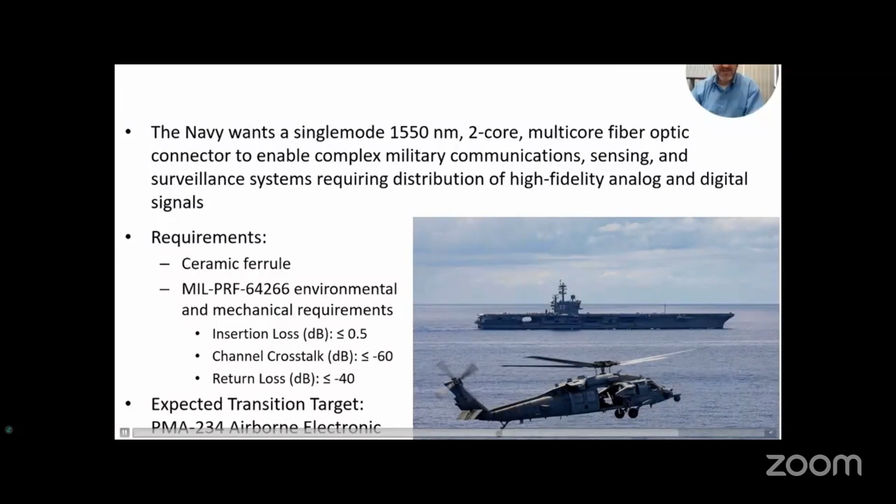Artificial intelligence is accelerating fiber sensing capabilities, enabling real-time data processing, anomaly detection, and predictive maintenance. By combining AI-driven analytics with distributed acoustic sensing and other sensing principles, we can reduce costs, enhance network resilience, and support smart city developments.

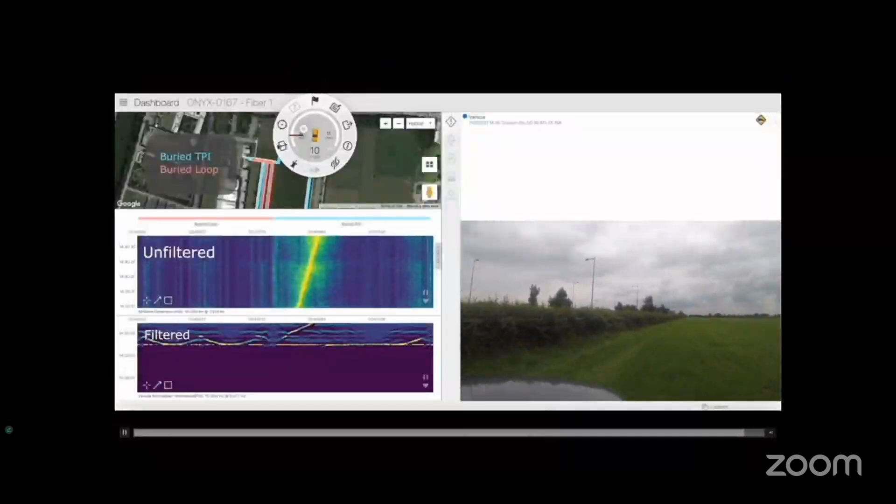Thank you very much, everyone, for joining the online industry meeting on fiber sensing. We are all really excited about this topic for many reasons. Some of them I just said in the video, others because this is a community. All of you are a community that have been working on this topic for many years. And I think we have a huge opportunity ahead of us.

We have seen for the first time really telecom operators, companies like Alcatel, like Telefonica, really looking at fiber sensing technologies. On the other hand, companies like, I see Renko here, companies like Somni Solutions made a revolution on testing fiber sensing principles on the Genoa bridge already a few years ago. The industry is looking at us, and we have a problem and a solution to identify the amount of data that we can generate with DAS, DTS, and other sensing principles.

So in the next hour and a half, let's rock the world of fiber sensing. It means the world to me that we have over 100 people this morning here to talk about fiber sensing principles. Let me just say in a couple of words what we want to do here.

So today is all about a meeting in fiber sensing technologies. And as I said before, LioniX and the silicon nitride platform and VPI Photonics and their simulation software is here to let us have a meeting on fiber sensing in which we're going to do the following. This is the rules of the game.

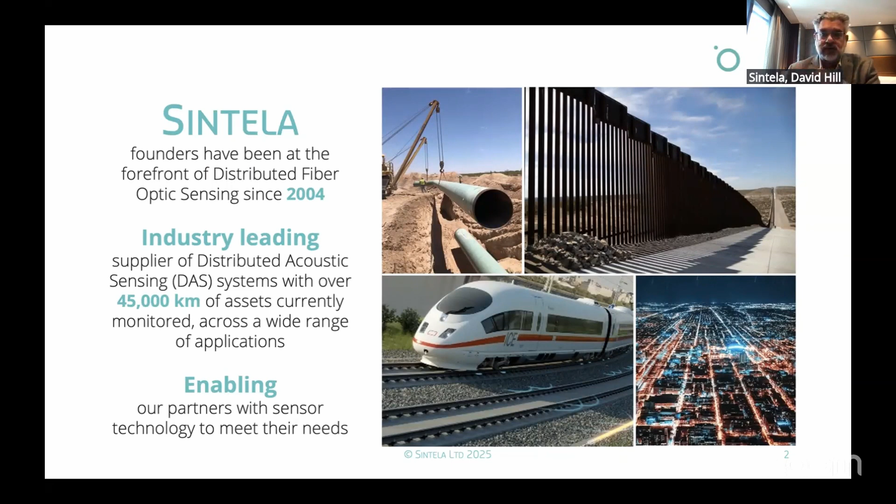So first, I wanted to introduce to you what actually is distributed acoustic sensing. We take standard single mode optical fibers and shine a pulse of light down it. As we shine a pulse of light down it, we get Rayleigh backscatter, and we monitor that Rayleigh backscatter. Because the speed of light is constant in fiber, we can time slice that reflection back, and we can create essentially virtual sensors all the way along the fiber. As DAS has developed, the sensitivity has improved, and therefore the length that we can monitor over. We're now at a stage where on a single fiber, you can do well over 100 kilometers at a meter resolution.

This, in effect, turns any standard single-mode fiber into an array of virtual sensors positioned every few meters. So if you can imagine putting a microphone next to your asset, whether it be a road, rail, bridge, whatever, that's essentially what we create using DAS technology.

Within Sintela, we have a range of different products. Our flagship product is called the Onyx PETA, and the name PETA hints at the amount of data this instrument produces. We can get well over a petabyte of information generated per day through this unit.

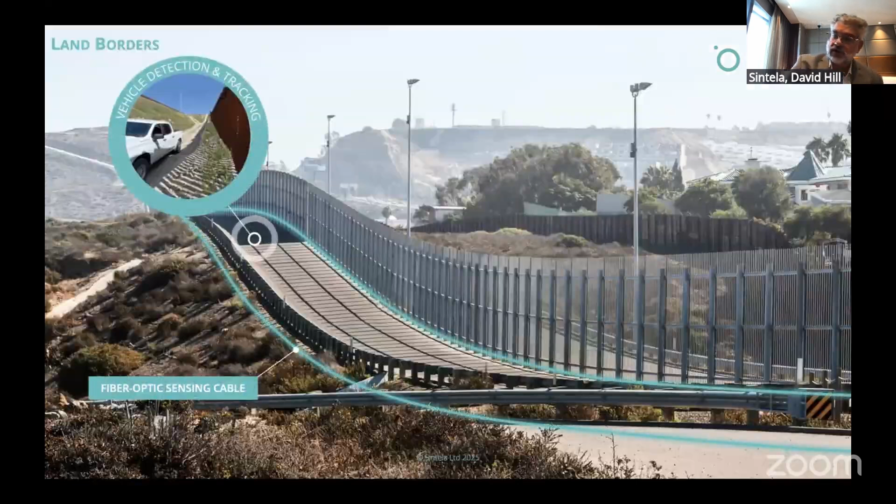So that's essentially our product line. But how do we use it, and what applications are these technologies used for? Well, there are multiple. One of the key ones at the moment is border protection.

These systems we deploy using fiber that's already deployed along borders, normally buried in the ground. We can use the sensing system to detect and, most importantly, classify activity of interest, whether it be a moving vehicle, a person walking, somebody climbing a fence, or cutting a fence. These systems are deployed along the US border and other borders, and have proved to be an extremely effective way of providing covert, persistent, and gapless monitoring of very large borders.

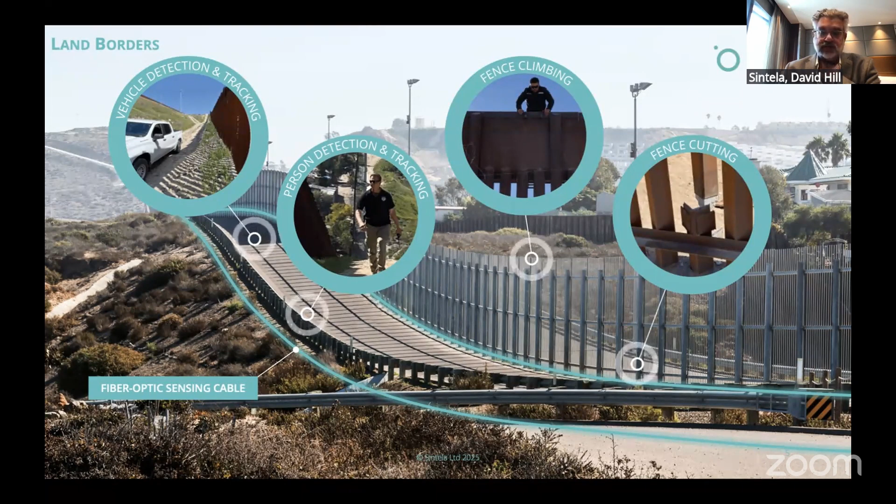In a similar vein, you can also use it for critical national infrastructure and perimeters. On borders, it's typically buried, but you can fence mount it, and on perimeters, many perimeters, you would fence mount these systems.

Fiber optic sensing hasn't had a great reputation in the past for perimeter security because it tended to false alarm a lot. The reason this is very effective now is we have extremely high probability of detection, but most importantly, extremely low nuisance alarm rates, which makes it a very effective tool for perimeters.

Again, you can detect people, fence climbing, cutting, but the important thing is you can use the information, the geolocation of events, to slew to cue other assets such as cameras.

In the rail industry, we work with partners, a company called Sensonic, and they use the fiber to look at train wheel defects as well as track defects, also rockfall detection, and security applications such as railway infrastructure theft, like people stealing copper cable. This gives continuous monitoring of all of these assets.

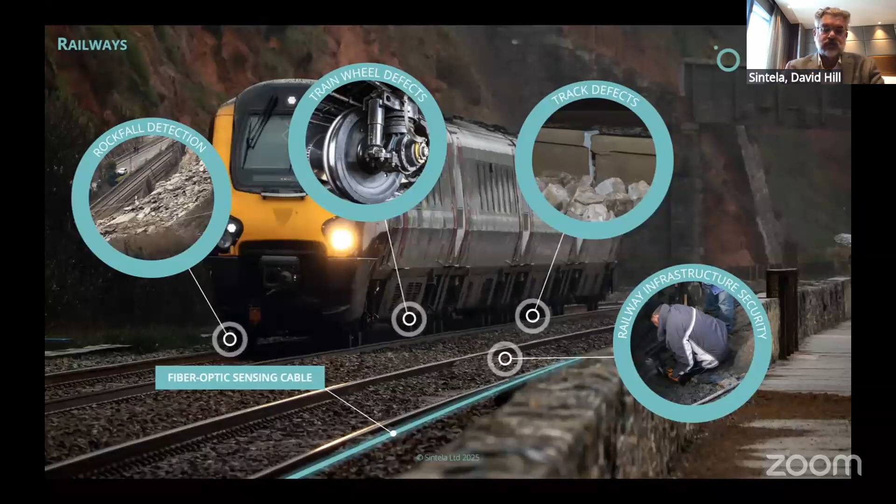On highways, this is deployed along highways using the telecommunication fiber that's often in place. It may be on the hard shoulder or down the median strip, the middle of the road. Using this fiber, we can gather effective traffic flow statistics, looking at the volume of traffic, the average speed.

And what it's doing to inform traffic management systems. But also we can look at condition monitoring of the road surface and have situational awareness should any incident occur, such as a crash. We can see that within the data, and we're writing algorithms to automatically alert on those events.

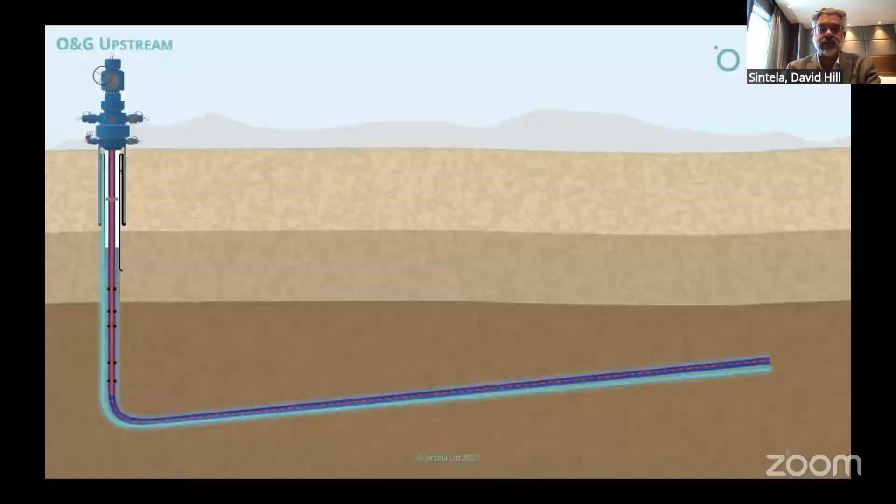In the oil and gas industry, on the exploration and production side, we're partnered with a company called Schlumberger, or SLB as they've now been called, which is the world's biggest oil and gas service company. They exclusively use our product to monitor fibers that are in wells, for both passive and active seismics, flow, injection flow, and production flow, noise, cross-well strain, and many other measurands that can be detected on the fiber in wells.

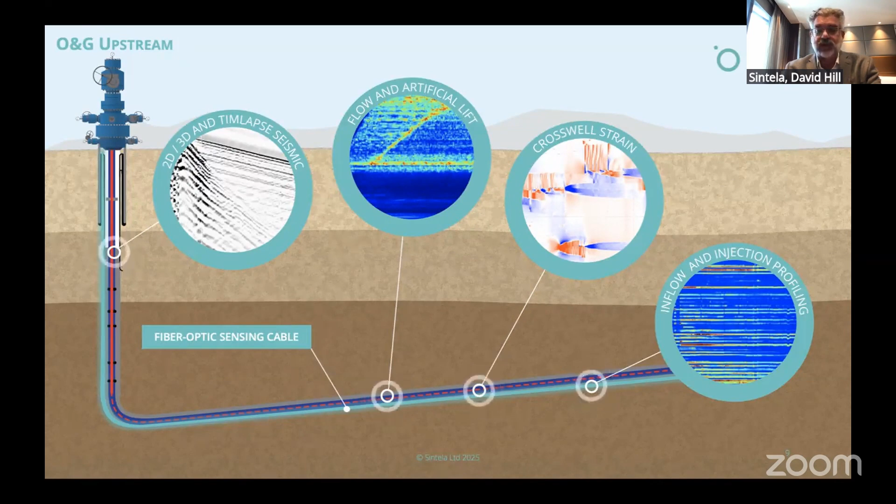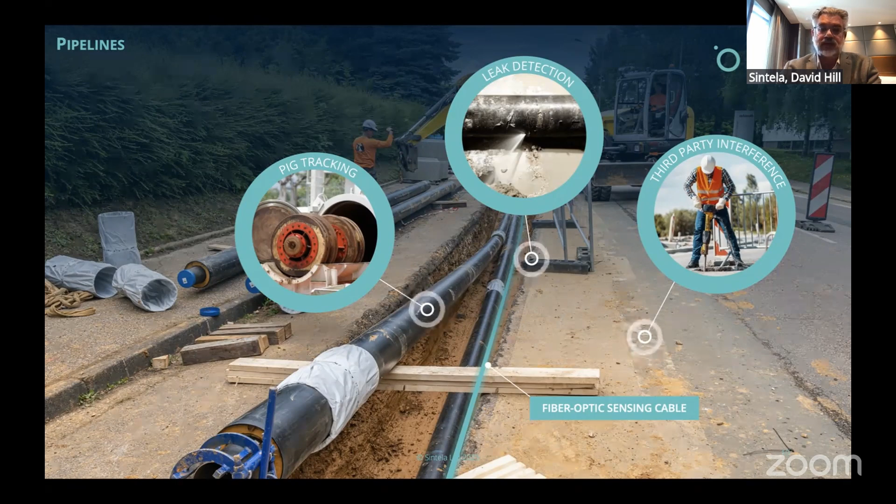Also, we look at pipelines. This is the area where we started 20 odd years ago, using telecommunication fiber that's laid next to pipelines. These are quite often transcontinental, many thousands of kilometers in length. The DAS systems monitor for a number of things: third-party interference, people either accidentally or intentionally trying to get to the pipe to steal product or do damage, leak detection along the pipe, as well as monitoring the location of the pigs, the pipeline inspection gauges used to clean the pipes.

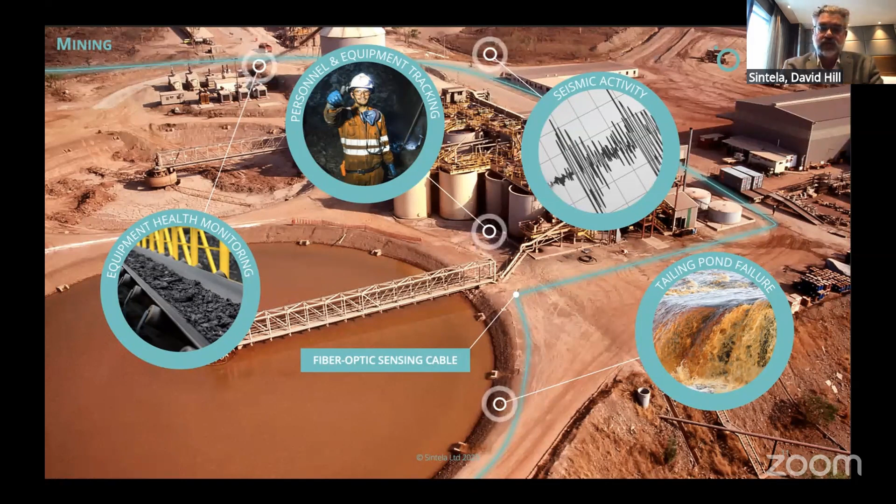Mining is quite a new area for us, but has many applications. Everything from seismic monitoring to make sure that when they're doing block cave mining, the rock is stable enough to be mined. We're looking at tailing dams and ensuring they're not about to fail. Equipment health monitoring, such as the very large conveyor belts, is also being monitored using our systems. And we can actually track the people within the mine shaft itself, detecting the presence of people and machinery to give mine operators an overview of exactly what's going on within their mining complex.

Power industry is a really exciting one. The world essentially has to double its amount of power transmission within the next 25 years to meet global demand because of EV vehicles and the drive to net zero. So being able to monitor these power lines to improve efficiency of power transportation is a key thing, and that's what we do - both detecting things happening to the power lines, and detecting what's happening to the conductors themselves, to improve transport efficiency.

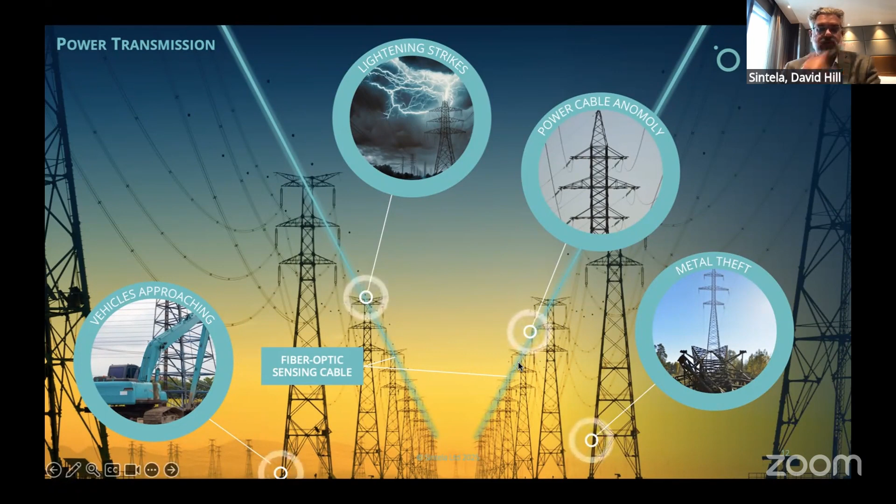Subsea cables is another big area - you'll see it in the news at the moment. We have several of our systems employed on subsea cables, monitoring them for anchor drag and cable damage, as well as potential third-party interference.

The final application is in the science community, the geoscience community in particular. Lots of universities around the world use the units for measuring seismic activity, earthquake monitoring, volcanic activity, as well as monitoring the cryosphere - what's happening to the ice caps. If you go to our website, you can see live feeds of earthquake activity, for instance, and some of the other things we did.

So that was a very brief, quick run through of the various applications this technology is currently being used for. I think it continues to evolve and develop as the technology does.

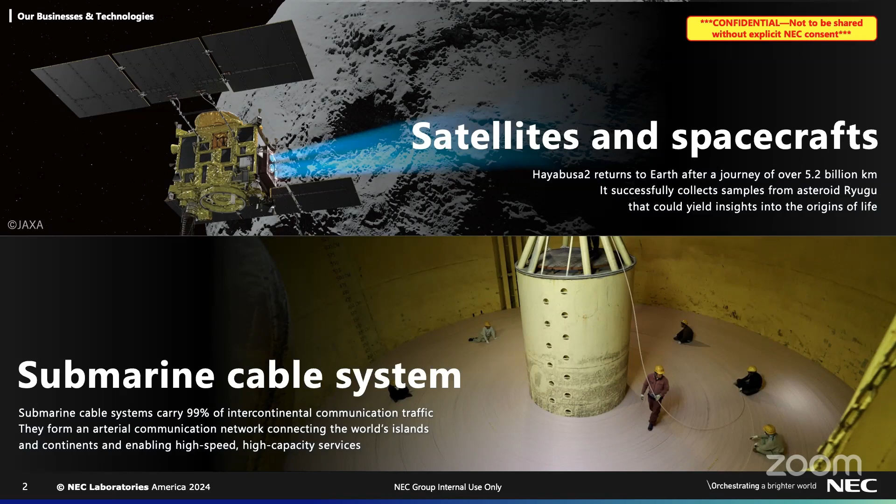NEC Laboratories America is one of several laboratories globally for NEC Corporation, which is based in Japan, a $30 billion year-over-year ICT corporation. The elevator pitch we like to say is we do everything from submarine cable systems to satellites in space and in between, like biometrics and, as I'll talk about, optical fiber sensing.

I am in the laboratories in Princeton, New Jersey, in America. We have offices in Princeton and Silicon Valley. We have many departments doing many amazing things, such as machine learning, etc. I am in the optical networking and sensing department. Our core expertise is optical fiber communication, free space optical communication, and optical sensing.

We've worked for many years on submarine cable networks, and that is kind of where our take on optical fiber sensing came from — the expertise in the most adverse optical environment, which is the long distance and hardship of a submarine cable. We've taken a lot of that secret sauce and put it into our optical fiber sensor, which I'll talk about today. Before I was at NEC, I was actually in the United States Army, interestingly enough, so we also like to think about this from a mission critical kind of perspective for our technology.

Also, just a quick shout out to Optica. We're very happy to participate in many Optica things. I used to be on the editorial advisory committee for Optics and Photonics News, and I'm currently a topic chair for Frontiers in Optics. If you want, please submit to Frontiers in Optics — the deadline is coming up in a couple months. We're very happy to participate in all Optica events. So thanks, John and everyone, for inviting us.

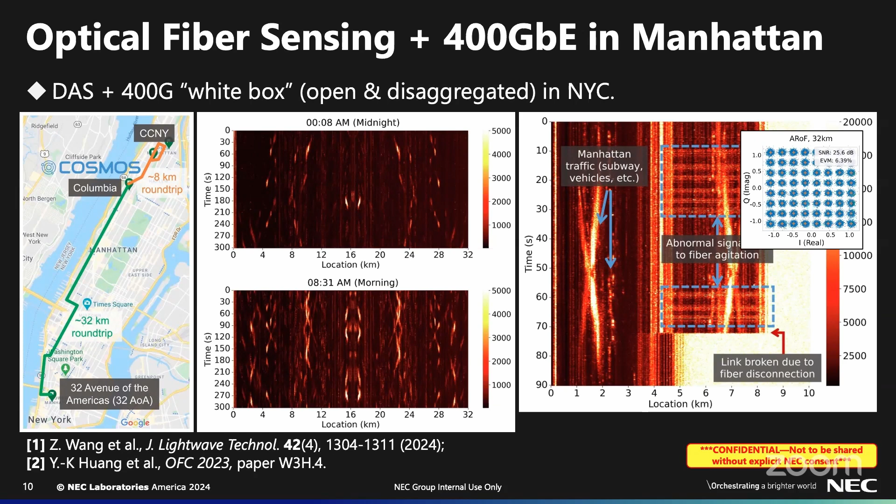What we also did over the years is plug into many different telecommunication providers' networks. We can detect things not just like traffic, but also what the telecommunication provider is interested in: is someone going to dig up the fiber cable or damage it? We want to know if they did it and where, but we also want to be able to preemptively prevent it.

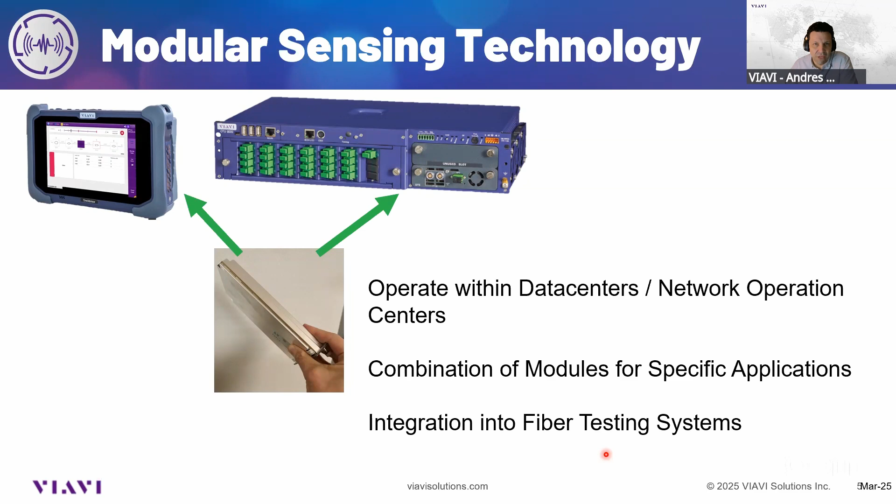Of course, that's the hardware. There's always software. We operate very large networks worldwide, and they share this principle when looking at our network monitoring systems, where our interrogators push data and alarms into the cloud or local networks. In this data analysis, we're going to not only have diagnostics for the fibers, but we can start to do a lot of fiber analytics on how our optical networks are behaving with respect to time.

Which segments may be at risk? Which segments need some level of maintenance? Something very key within telecommunications, and usually a challenge when dealing with these types of cables, is that we need very good GIS capabilities. Since we're already monitoring these very long networks, we can start to georeference all of our alarms.

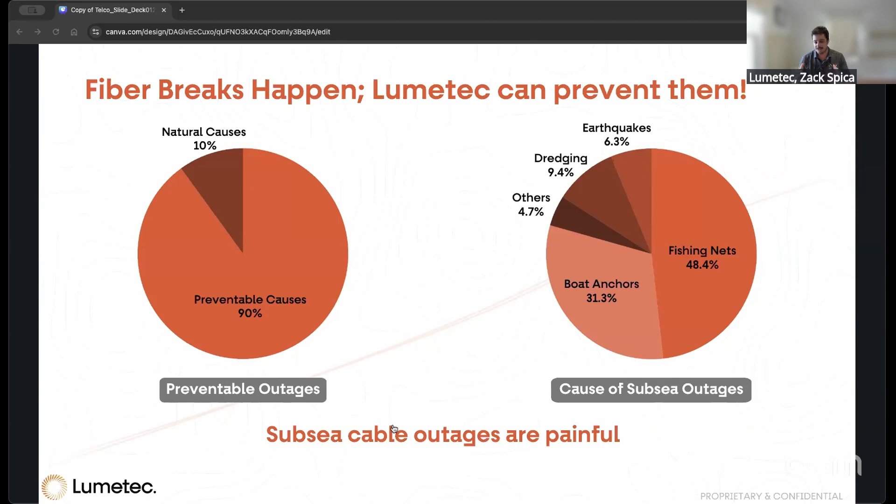So that's really our target. That's what we want to stop, and that's what we want to prevent. But as I said, fiber sensing as a service alone will not solve this problem, because yes, you can have some information, you can know what's happening along your fiber, you can know there's a vessel approaching, you can track them in time and space.

But who are they when they have their GPS or beacon off? How do you recognize them, and how can you actually transfer the liability from the telecom industry, the telecom owner, to actually the culprit that may provoke an accident? That's why we are now merging many different data sources that are available, including satellite data, radar, and long-range sensing, to learn what's happening past the first repeater, where DAS and distributed acoustic sensing is not useful or available.

So our product, which is really tailored for the telecom subsea industry, offers 3 pillars: threat detection, real-time monitoring of surface and ground movement, and contact activities that could harm the fiber. What's really important here is surface and ground contact, and that's where fiber optic sensing will be important, because if there's a boat crossing on top of the fiber, that's not an issue. But if there's contact with the ground that we can detect with long-range sensing or DAS, then that's going to really trigger an alert.

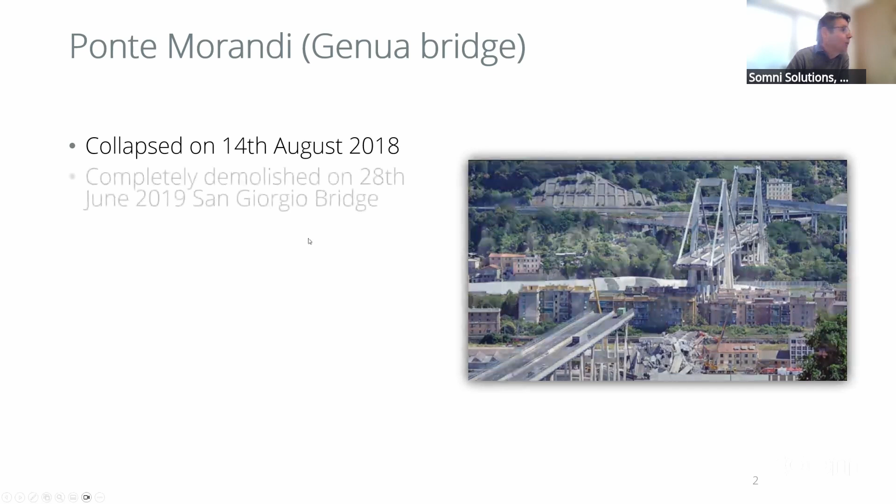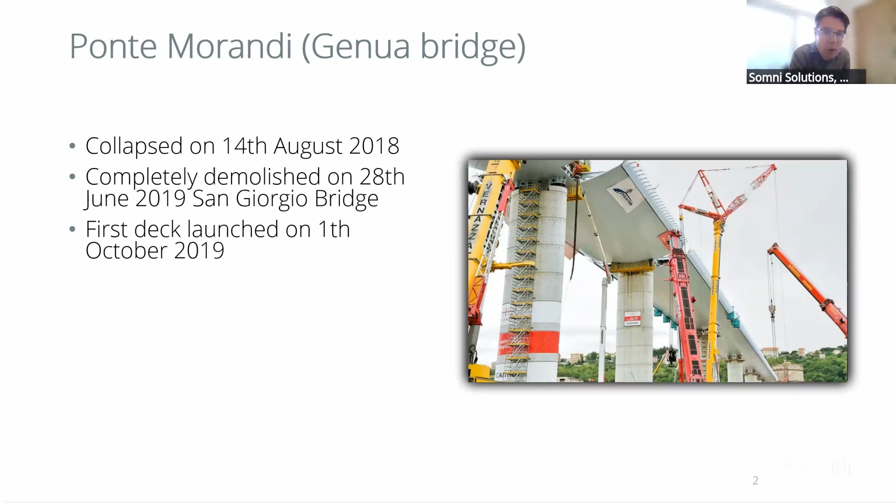So a new bridge had to come quite soon. The whole bridge was demolished in June 2019, and there were plans to make a new bridge, the San Giorgio Bridge. The first deck went really fast, launched in October 2019, as you can see here, and it was finished on the 28th of April 2020. That's quite impressive for such a huge civil engineering structure.

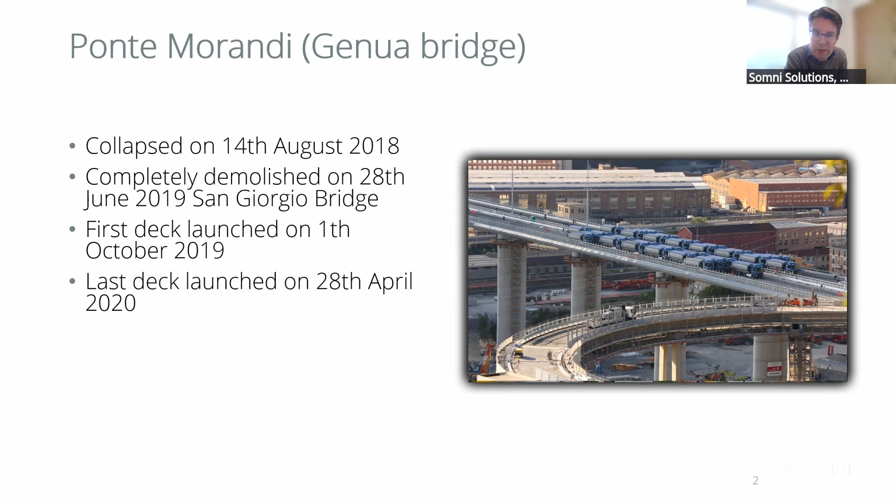For Somni, we provided a large number of tilt sensors, and to be honest, I must admit I bullshitted a bit that we had very good tilt sensors, which we did not yet have. So we were developing, and this was actually our first launching customer, providing 76 tilt sensors to be installed across that bridge. You can see a photo of all the tilt sensors we provided.

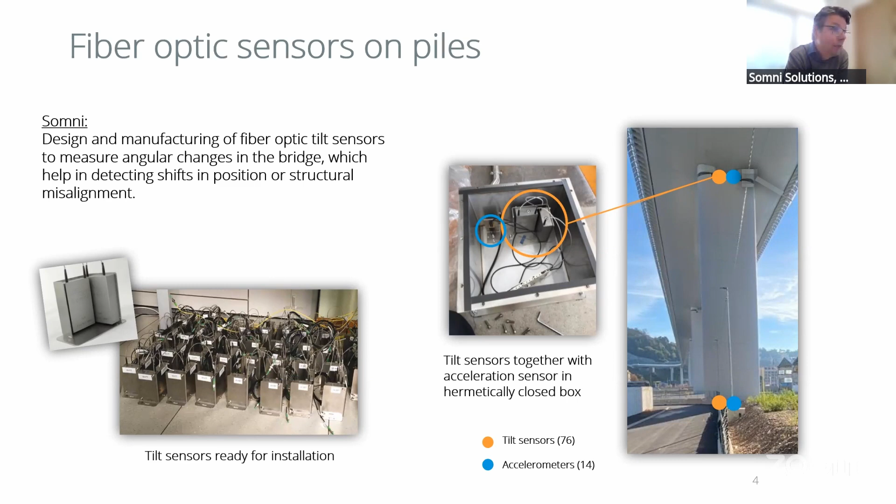They were mounted into enclosures together with accelerometers from Luna, and installed on the top and bottom of each pillar of that bridge for continuous monitoring, 365 days per year, 24/7. And that monitoring is ongoing as we speak today. It's now 5 or 6 years that stuff has been installed, and the monitoring is still continuing without dropping a single data line. So it's working very nicely.

I think this is a very nice example of fiber optic sensor companies working together, providing different types of sensors and interrogators, to jointly come up with a full solution for a bridge. So yeah, thanks again to Luna and Sylex for working together on this specific bridge. And I hope for the upcoming years we can continue monitoring this bridge proactively and avoid any issues in the future. That basically drops down to the end of my presentation. I want to thank you for your attention, and if there are any questions, please let me know.

Remco, thank you so much for your presentation. It's actually a bridge I've personally been over, and it's a great example of collaboration between companies.

There's been a number of questions in the chat relating to distributed temperature sensing, distributed acoustic sensing, and fiber Bragg grating sensing. How would you compare them all briefly?

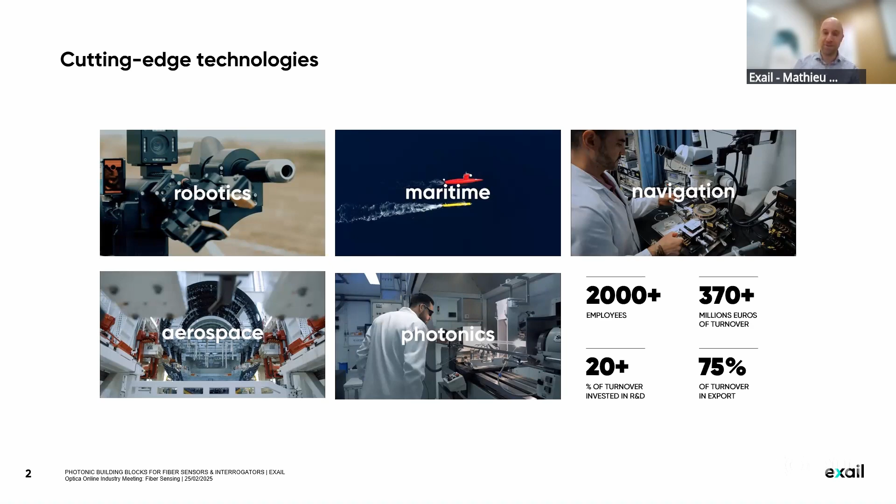So we do optical components, COTS components, and we have three big families of products: lithium niobate modulators for amplitude or phase modulations, micro optics assemblies for example for coherent detection, polarization control, and so on, and specialty optical fibers with again 3 subcategories - active fibers for lasers, PM fibers, and passive fibers.

So we do these optical components in-house, and we also do instruments that heavily rely on these components. Exail has a long history of making fiber optic gyroscopes - those are inertial navigation systems. Basically, they tell you where you are at any given time without GNSS.

If you're not familiar with fiber optic gyroscopes, it's essentially 3 rotation sensors and 3 accelerometers. With these 6 sensors, you can know where you are in real time without GNSS. And for these FOG instruments, the rotation measurement is done using fiber optics. You can see here on the right side a schematic of a FOG instrument, and you can see the coil of optical fibers - that's typically a couple of 100 meters of fiber that is being used to measure rotation.

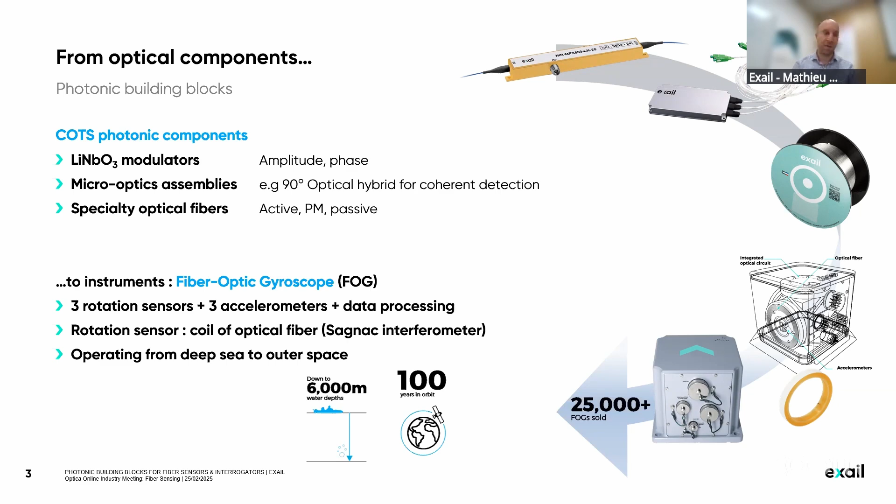Why specialty fibers for sensing? Really, it's a complement to standard telecom fibers, not meant to replace them. When you can use standard telecom fibers, it's still the preferred option because it's very cost competitive. So specialty fibers come into play when you require a specific waveguide or a specific geometry, or you want a coating material that is not the standard acrylate coating that you find on standard fibers.

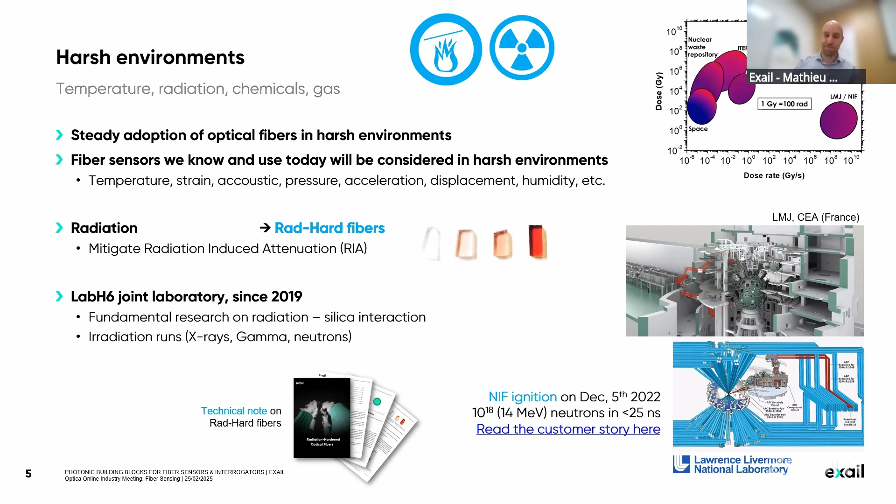And this is my last slide. So I'm trying to answer the famous Optica question: what we can offer is COTS photonic building blocks for both interrogators and fiber-based sensors, so with specialty fiber. We have solutions for standard environments, but also harsh environments, both radiation and temperature.

And also with fiber, there is always this barrier of custom developments. So there is what is available on the website, but we have also many references in stock that are not shown on the website. So if you have some requirements, don't hesitate to contact us, and there is probably something close to what you need available.

As an industry, I think what we need to do is strengthen the collaboration between cable manufacturers, specialty fiber manufacturers, and interrogators, because the spec of the complete system depends on all aspects: fiber, cable, and interrogator. For harsh environments, the fiber can withstand temperatures up to plus 400 degrees C, for example, but there is really a need to package this fiber in most cases, and those packages also need to withstand extreme temperature and radiation levels. So I think there's still some work that can be done on this side.

And that's the end of my presentation. Thank you very much.

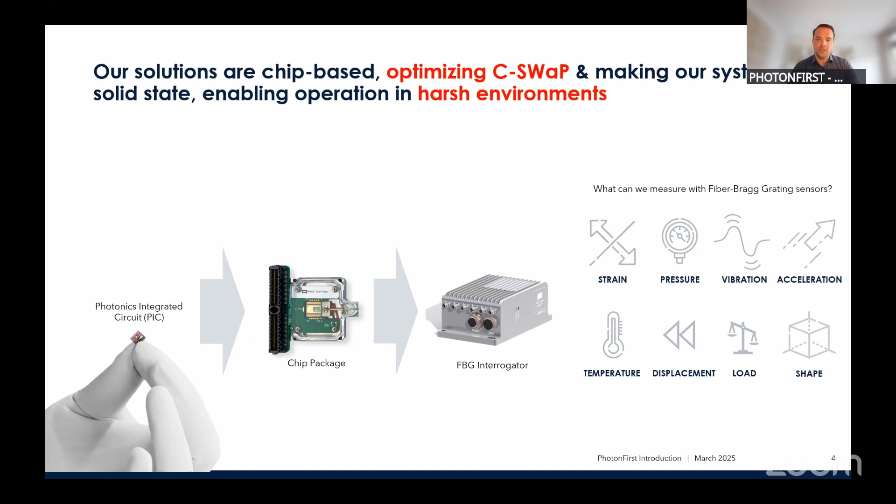We do FBG interrogators and fiber sensing as point sensing, like Remco just explained well. I do want to add that point sensing is not only needed for point sensing applications, it's also a very cost-effective way of applying fiber sensing compared to distributed sensing. I put some numbers in that perspective. Pim's dream has always been focused on integration of optics on PICs from a cost curve perspective.

Like other FBG interrogator builders, Technobis PhotonFirst also started with a 50K FBG interrogator. The last couple of years, we've been around 5K euros, and with the current dollar-euro rating, you can easily read dollar there too. 5K per system. And always with the promise to add more components onto PICs, not just the spectrometer, but also light sources, a combination of polarization units, and also optical switching.

I'm happy to report that this year we're launching Gen 3 systems, which are sub 1,000 euro and will read out up to 1,000 FBGs on one fiber for 1,000 euro per interrogator, which doesn't exist elsewhere in the world, truly leveraging the fact that PIC-based is the way to go in terms of scalability and cost effectiveness. How does that work under the hood?

This is basically what we call the generations of systems, as we go integrating optical components on chips, gluing the chips together. That's why we also do our own packaging at PhotonFirst, and even combining in a next generational system that with an ASIC to go even below 100 euros per system.

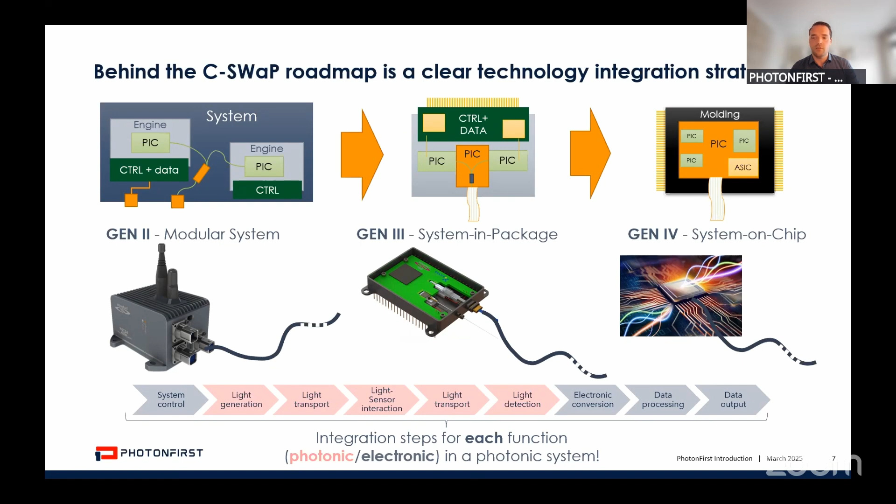This has always been a price point discussion. However, we also see a huge additional benefit of going PIC-based. The fact that we use PIC-based systems is not only potentially really scalable, and as you can see, really cheap, but it's also basically a solid-state system, allowing us to use these interrogators in very harsh environments.

We developed multiple customer-specific systems with DO-160 shock and vibration proof monitoring solutions, aerospace-graded interrogator systems, which can rotate 900 RPM while you don't see it back in the signal. This is a miniaturized interrogator with edge computing built in, wirelessly transmitting real-time data as it rotates 900 revolutions per minute on top of an Apache helicopter. That's what chip-based sensing can do.

Here's a video of the wind tunnel testing of that system itself. And we even launched one into space, surviving minus 53 degrees centigrade and still functioning.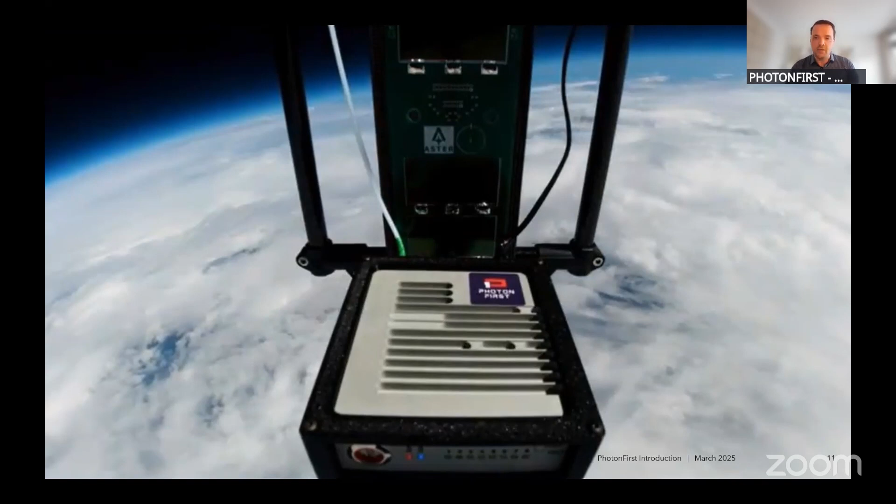As I said, we've been leveraging this knowledge already for years in developing customer-specific interrogators and doing projects with those. We do that in our own clean room in Alkmaar. We have our own packaging facilities, and we chose to industrialize this packaging of PICs ourselves. Most packaging capabilities in the world are based on datacom, meaning they glue chips and fibers together, which is fine if you want to do Netflix.

But if you want to rotate it on top of a helicopter, you need a more sturdy way of coupling, which we developed ourselves. We weld the fiber next to the chip to make it the most sturdy combination possible. This is such a popular packaging capability that we even sell this as an opportunity for others, for example LiDAR parties and quantum computing parties, whose chips we package in-house in Alkmaar.

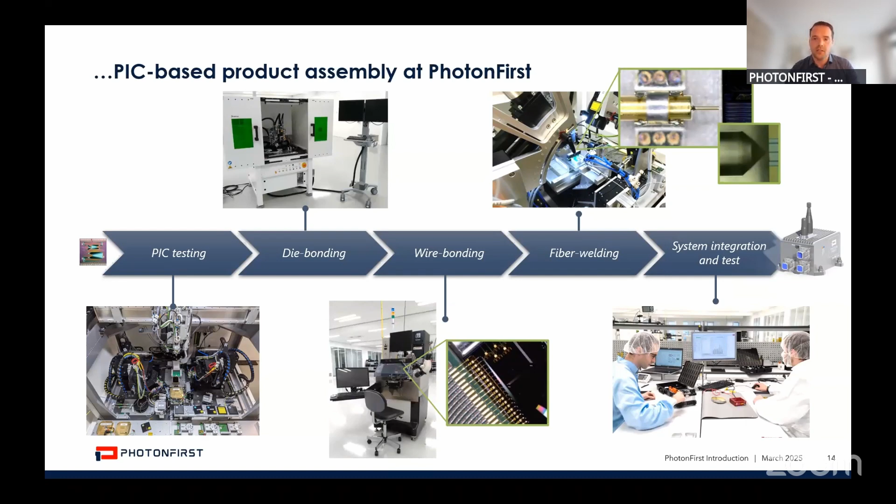I'm also happy to say that not only do we help back-end customers with customer-specific systems, but also, if you look now at our website, we're launching a whole variety of systems leveraging the Gen 3 and harsh environment edge of PICs.

We've traditionally had FBG systems reading out 8 or 64 FBGs. We added edge computing to that, and we now have Gen 3 systems, which we call the Nexus family, where the Nexus 100 reads out, surprise, 100 FBGs on one fiber, and Nexus 250 reads 250 on one fiber, pushing that to 1,000. And to come back to Bram's question to Remco, we truly believe you can push the amount of FBGs on one fiber, which we are doing, while maintaining cost effectiveness, with edge computing at the interrogator itself. A decentralized approach of these interrogators communicating with each other creates a more cost-effective web for the total solution. Again, that's the only thing PIC can do.

I do have to come to the conclusion that selling just interrogators is a difficult task. A lot of potential customers need to see it happening in the field.

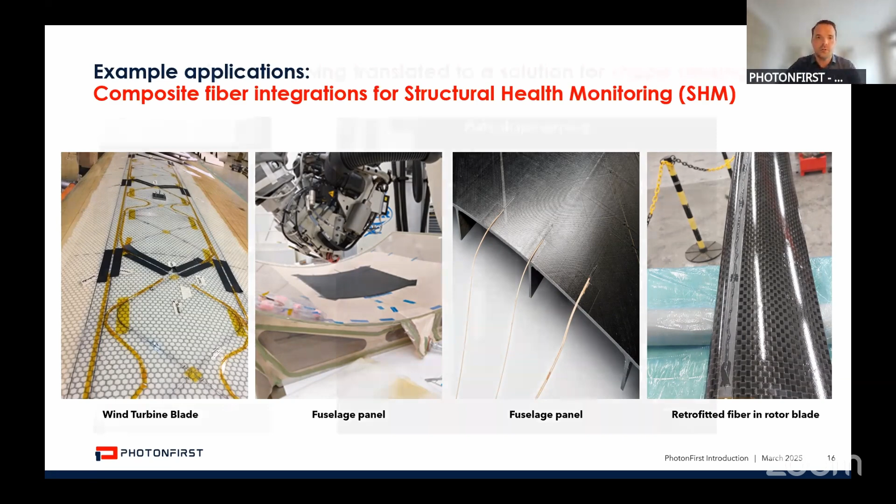That's why we also invested heavily with DLR and NLR, the German and Dutch aerospace laboratories, in applying our fiber knowledge on rotating assets, meaning windmills, but also in defense applications. Here you see a couple of examples where we embed fibers inside or on composite structures to do whole shape deflection or impact detection of composite blades, as shown in the middle. And if needed, we can even do complete shape sensing of a fiber with our interrogators as well.

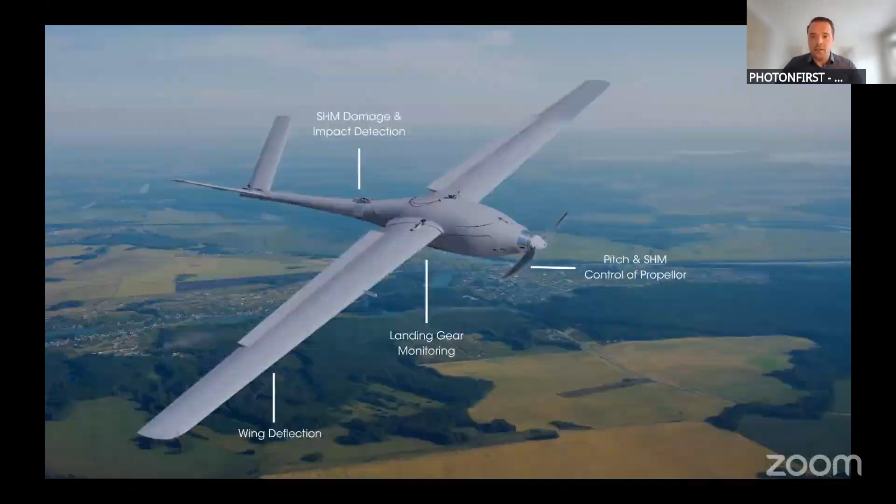To finalize, PhotonFirst delivers and has been delivering for years in traditional fiber sensing applications like structural health monitoring, bridges, transformers, on the railway side, in aerospace. But what you typically see now in the last couple of years is that harsh environments really leverage PICs, not only for cost effectiveness, but in literally space launching systems. I'm happy that Europe is catching up to the US in reusable space rockets, and happy to report that we're in both, and even on rotating assets in the field.

So that's where we are today, and I hope I inspired you a bit to see where we're heading in the next couple of years to further integrate solutions on PICs. If anybody likes to talk further, or we can help you with collaborating with each of you, or support you with fiber sensing systems, then please reach out. Always happy to have a chat, and that might lead to another nice partnership.

Thank you so much, Linda, on the incredible work you are achieving with PICs. I'd like to bring in a couple of companies who also make this kind of work possible themselves. So thanks to NVIDIA, silicon photonics is very topical this week. So I'd like to bring in Dr. Jake Bialy, CEO of Optica corporate member Light Trace Photonics, to introduce their pipeline for accelerated integrated photonic development to help unlock new applications like this that PhotonFirst have been doing. Jake, the floor is yours.

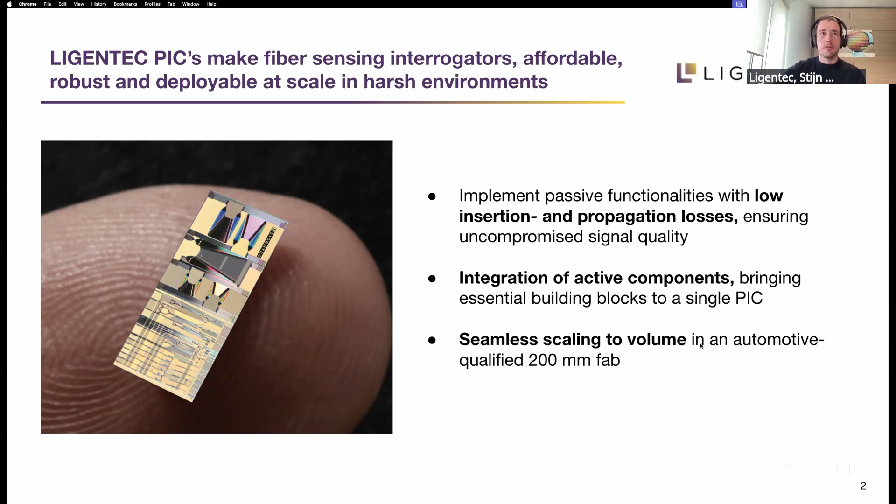Also importantly, all these silicon nitride PICs are manufactured in our automotive-qualified 200mm fab, to make sure we meet the quality standards required for this industry, but also that we provide a direct scaling path to our customers in this field. To give a brief example of what such a PIC would look like, we built roughly a year and a half ago a small demonstrator chip where we integrated a photodiode array using microtransfer printing.

So basically what we do here is we have a pre-processed indium phosphide wafer with a lot of photodiodes on top of it, and then we pick and place many of those photodiodes in parallel to print them on the silicon nitride circuit. Here you can see a small microscope picture of such a photodiode.

In addition, on the same chip, we also integrate the arrayed waveguide grating to build a full spectrometer circuit. Here we can benefit immediately from the low insertion and propagation losses of the silicon nitride, as well as the low phase errors and low temperature dependence, allowing us to have a stable platform for AWG development. This could, for example, be used in a fiber sensing interrogator.

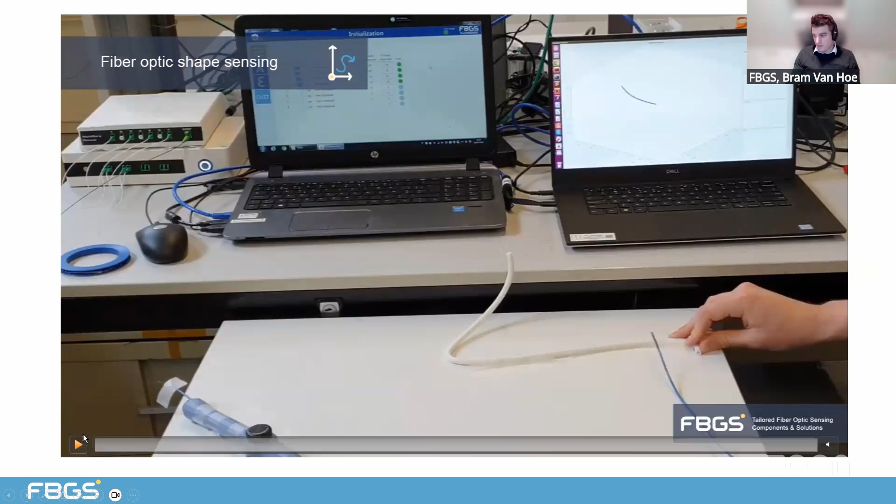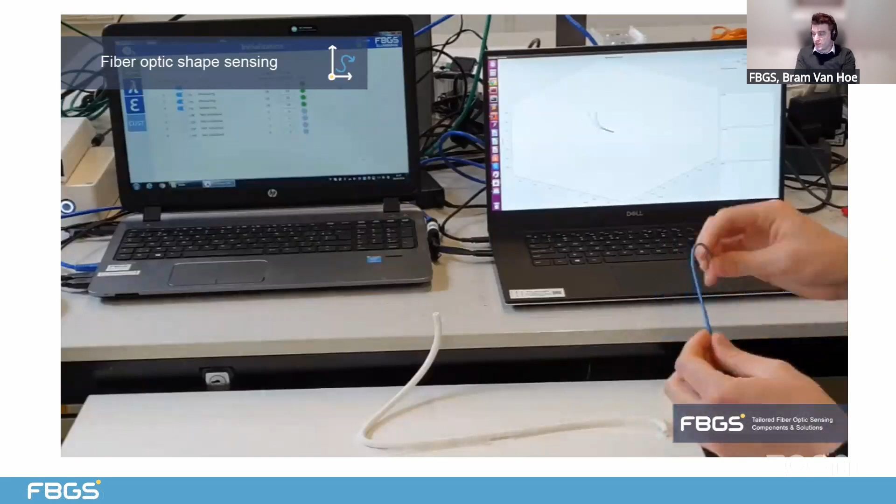To show you how the platform works, here we have a multi-core fiber shape sensor embedded into a catheter device, where the top 15-20 centimeters is instrumented with Bragg gratings and multi-core fiber. You see on the screen in the back that the shape is represented in the software.

This movie shows a different visualization, but comes down to the same sensing platform, showing 3D shape using a flexible nitinol-based shape sensor.

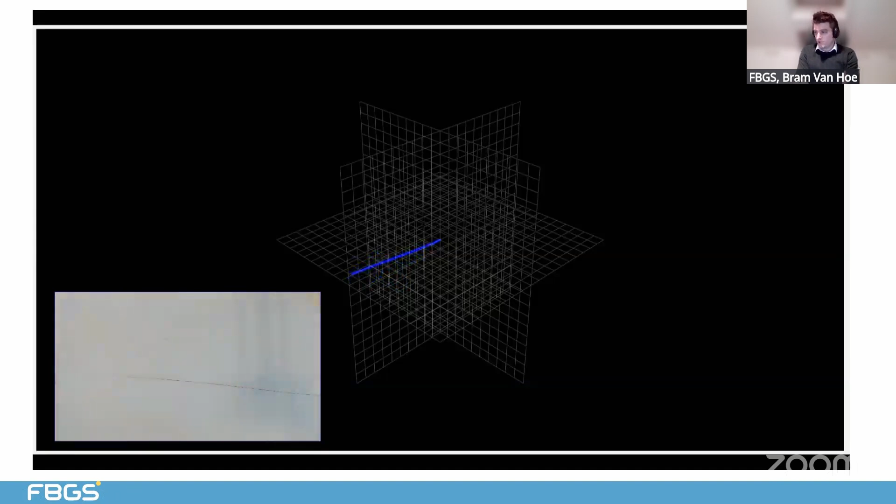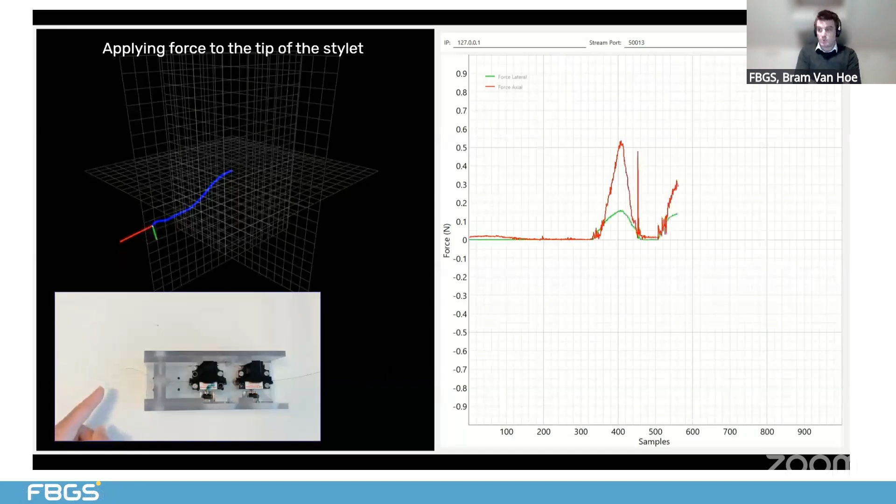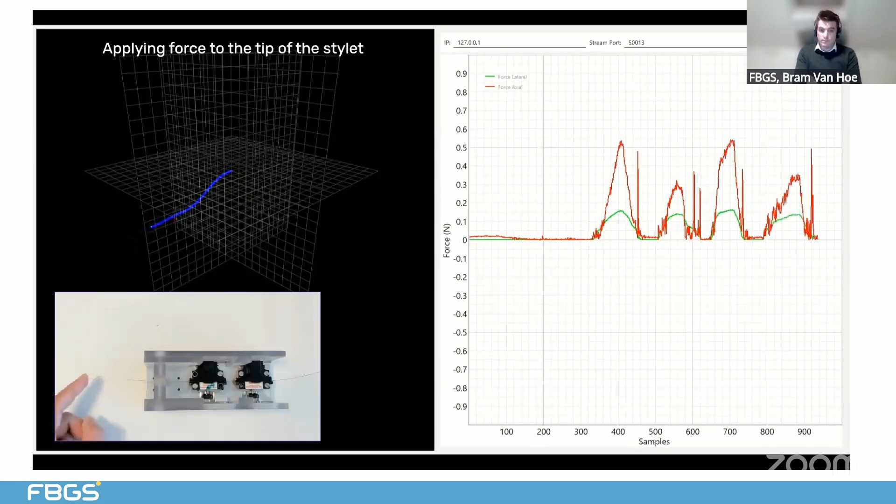Next in the movie is another measurement that can be picked up using the same technology, more specifically tip force. Making use of the same multicore fiber and adding a transducing element, it's possible to do shape sensing along the length of the fiber and also measure the directional force at the tip of the sensor, as you can see here in the movie.

We isolate the fiber, or the sensor, from axial strain effects. It's important to mention that this is a directional force sensor that is not prone to strain or temperature effects.

I rushed a bit through, but I would like to thank you for your attention. Of course, if there are questions, I'm happy to answer them, and we can also talk offline about your shape sensing application and your fiber sensing needs.

One quick question for you, Bram. During this meeting, we've been discussing a lot about companies wanting to do the fiber or wanting to do the interrogator. You actually are doing both for this particular application, fiber sensing and shape sensing. Why did you decide to do that?

Very good question. We decided to do that because we experienced that it is key to ensure the fiber and the interrogator are one-to-one matched, that the compatibility between all the building blocks involved in the system is there. Especially when combining gratings and multicore fibers, there are a lot of restrictions and technical aspects that need to be safeguarded on the interrogation platform as well. So building a full system all the way from the interrogator up to the fiber is key to ensure the overall performance of the system is maximized and that all the building blocks are communicating and interacting well with each other.

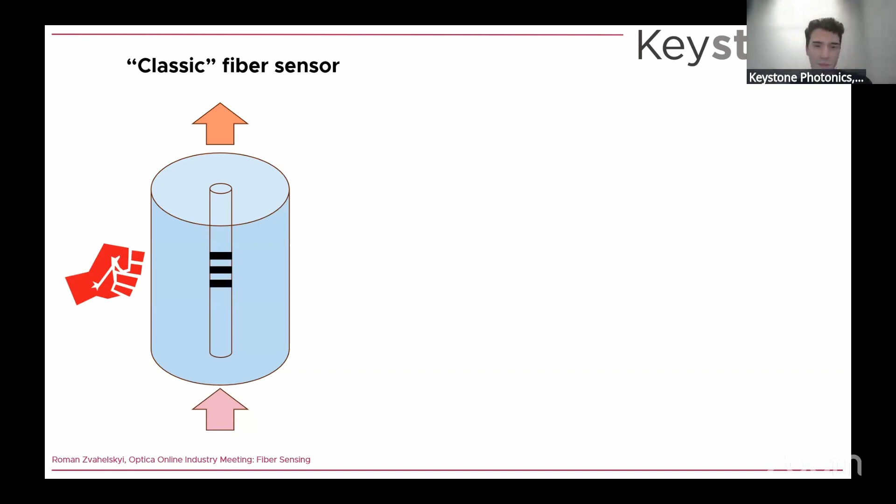Yes, thank you very much for this flattering introduction. I understand we're running out of time, so I'll try to keep it short and give a 1-2 minute pitch. I'd like to start with a definition of a classic fiber sensor. Typically we have a fiber Bragg grating, and if we heat up the fiber, for example, and then measure the reflected or transmitted wavelengths, we can measure the temperature change or strain change and other characteristics. But what we do at Keystone Photonics is something different.

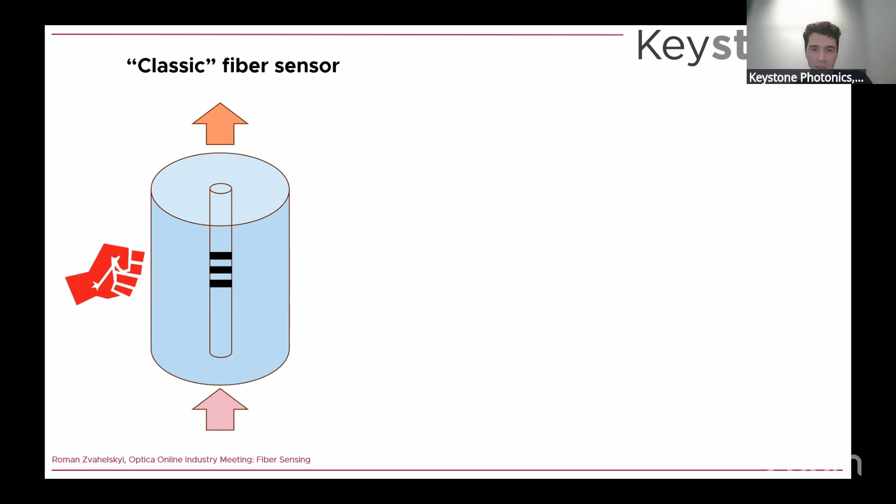So first of all, we don't hit fibers, but what we do is fabricate microstructures directly on fibers. We use technology, as you said, 3D laser printing or 3D two-photon polymerization, and we have capabilities to in situ fabricate micro-optical structures directly on a fiber core. So this is how it looks schematically, and this is how it looks in real life.

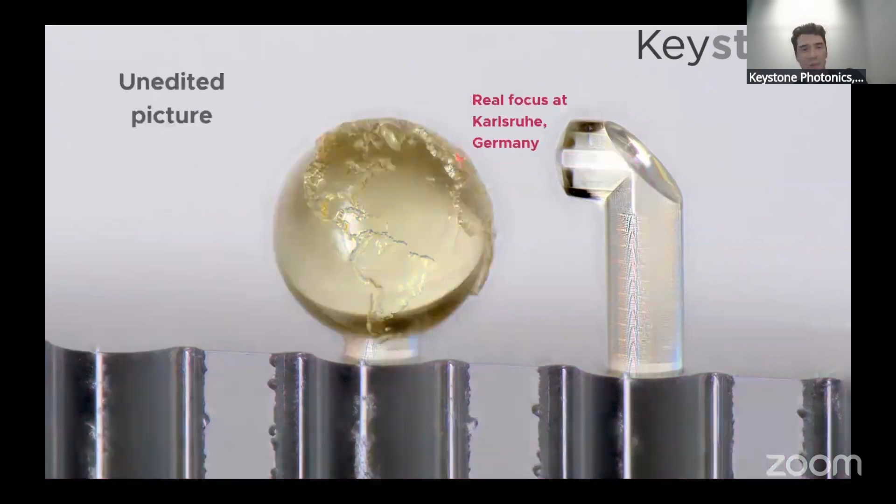This is a cross-section of a fiber array with printed structures by Keystone Photonics. So our typical product is, well, this globe represents a freeform structure, but our typical product is here on the right. This is a mirrored lens that can focus light into any direction, in this case 90 degrees, and this actually focuses into Karlsruhe, Germany, the place where Keystone Photonics is based.

So our typical market is wafer level testing, or optical wafer level testing. We're mainly dominating that market right now. We are the main manufacturer of optical fiber probes, and we collaborate with all major players in this area of optical wafer level testing. So we produce innovative solutions for optical coupling, both for trench coupling, as you can see on this slide, and also for grating coupling. But we're also trying to explore other possibilities on how we can expand the area of applications.

We're a fast growing startup company, and one of our developments is an optical distance sensor. Basically what we do is produce a lens which can introduce a point of best coupling. So if you move your fiber in Z back and forth and collect the back-scattered signal, you can achieve the point of best coupling, and then you can calibrate the distance between your fiber and your surface, for example of the trench or of your waveguide, very precisely. So you do not need any capacitive or other distance sensing devices.

This is one of the possible solutions to fiber sensing, but we are really open to your applications. If you have anything in mind, please reach out to us. You can write to me, or write to Keystone Photonics sales email, and we really want to explore and expand our possibilities because we believe we can use our technology, for example in spectroscopy, and we're also trying to expand into space applications. If you have anything in mind, please reach out. Thank you very much.

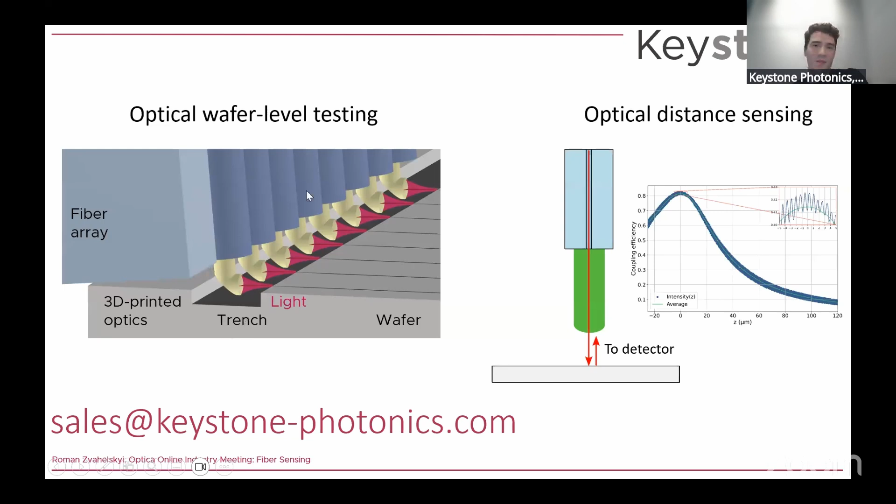Also tell us how the Quantum X can help companies like Chiral Photonics in characterizing specialty fibers. I just want to introduce you to what we can do as a manufacturer of equipment for two-photon polymerization, so micro 3D printing, to print optics for fiber sensing.

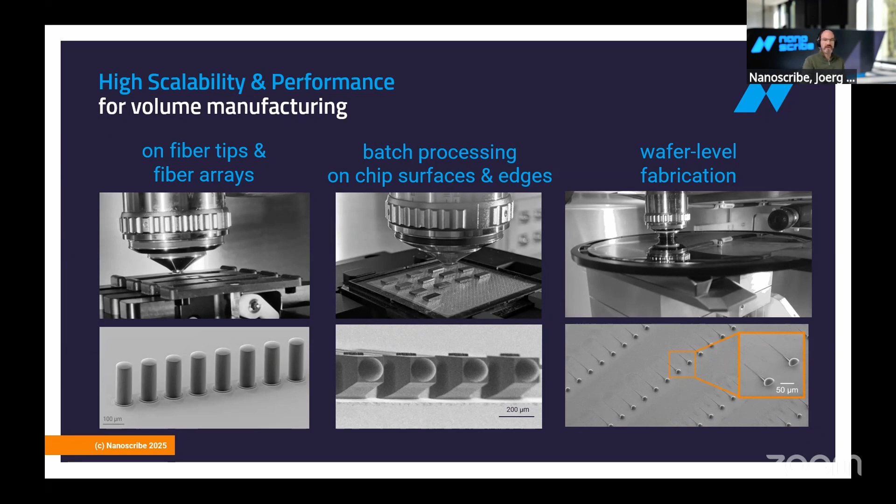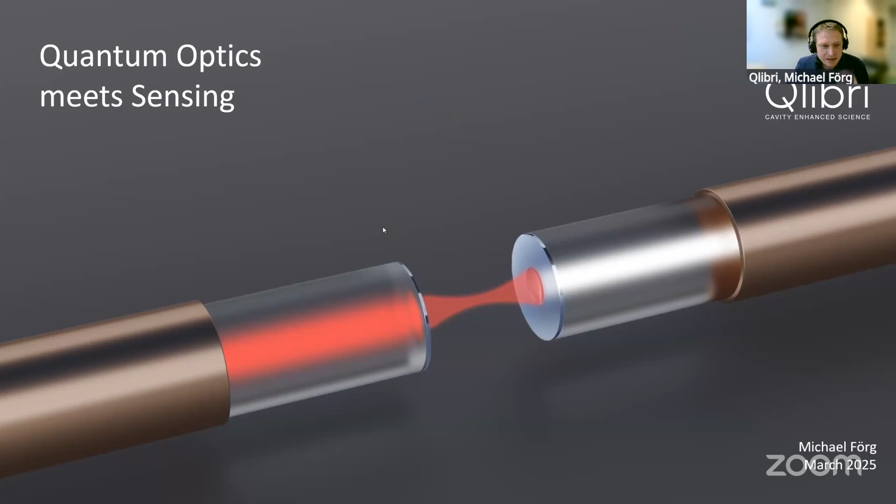Today, I'm Michael Förg, co-founder of Qlibri, and we are a startup actually coming from the area of quantum optics, and therefore are new to this whole sensing community. So let me give one slide for introducing who we are.

A couple of years ago, we started as a spin-off here in Munich from LMU and MPQ, collected some public money in order to build our first products. Those products are quantum sensing hardware. We incorporated then in 2022 and started selling those, making us a profitable startup.

Since then, we have grown. Currently we are 23 people, and we have global sales structures, and we want to expand to new directions. One of them is microscopy, and the other one is actually filters and sensing. That's what I would like to talk about today.

So what is the technology we are using? The technology, as you might know, is based on optical fibers, but which can be of different kinds. And here you can see an end facet of such a fiber.

What we now do, we shoot with a laser on this fiber in order to ablate a small concave structure. This is on the size of a couple of micrometers and can also be custom designed. And if you now add a highly reflective coating on this end facet, which also can be designed to your needs, you get a tiny curved mirror.

And this tiny curved mirror, if it now faces a similar one, builds up a stable optical resonator where the light can bounce forth and back between those two mirrors up to 100,000 of times.

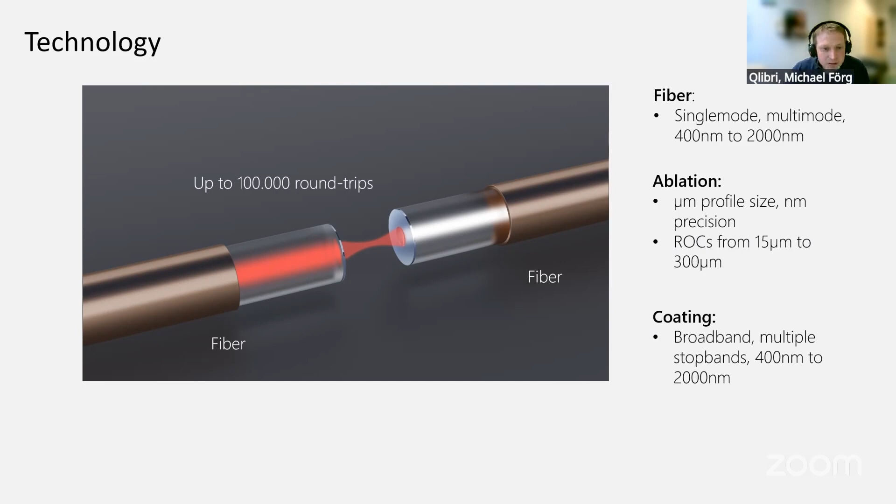Now, what can you do with this? First of all, you can think about a nice packaging, but the very straightforward and easy solution is, you can now use this as a tunable filter. With tunable, I mean, you can now tune these two fibers from basically touching to tens or hundreds of microns, giving you the possibility of tuning your free spectral range, tuning your line width, and so on.

Of course, where we come from is a different field. It's the field of quantum optics. Here, an example of customers of us from Harvard, they used such a system and put in single atoms between those two fibers in order to build high-fidelity quantum gates for quantum computing.

Of course, you cannot only use single atoms, but you can also use, for example, gases or liquids like done here, where people put in single molecules or single DNA strands in a microfluidic channel in order to highly sensitively detect and profile them. And of course, all these applications can only work if the distance between those two mirrors is controlled down to a subatomic scale.

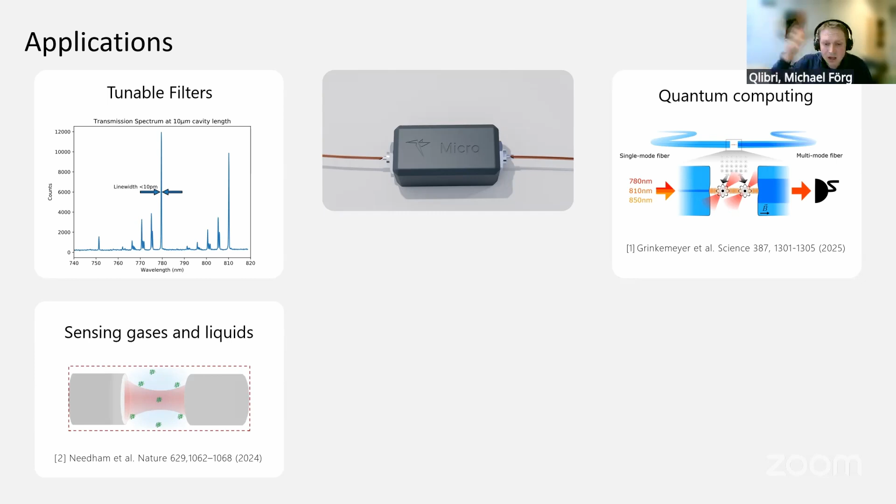And this, you can now also do the other way around. You can basically use this distance control in order to sense any changes of the distance or vibrations from the length scales of picometers up to micrometers.

Now, I tried to sketch a bit what we can do for you, answering the Optica question. Now, what you can do for us, we are always happy to talk about any sort of mounting solutions for these fibers, about packaging, and about your ideas where you think this could be nicely applicable to the area of fiber sensing. And with this, I would like to thank you for your attention.